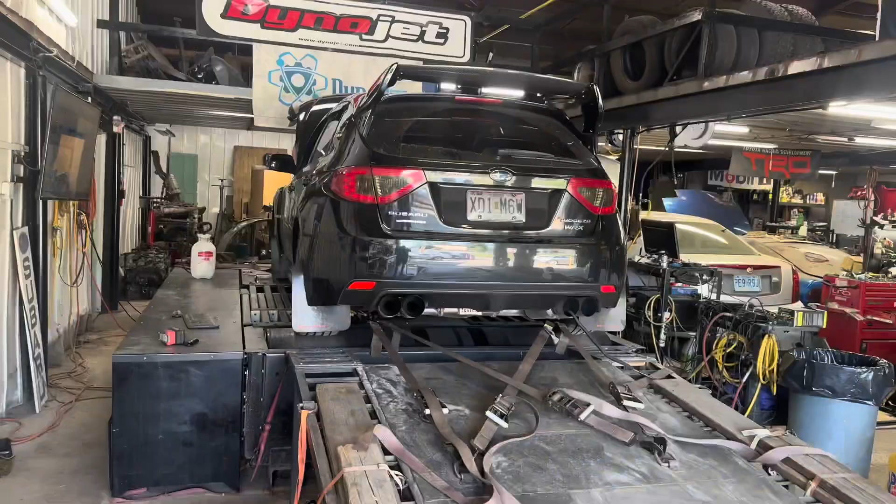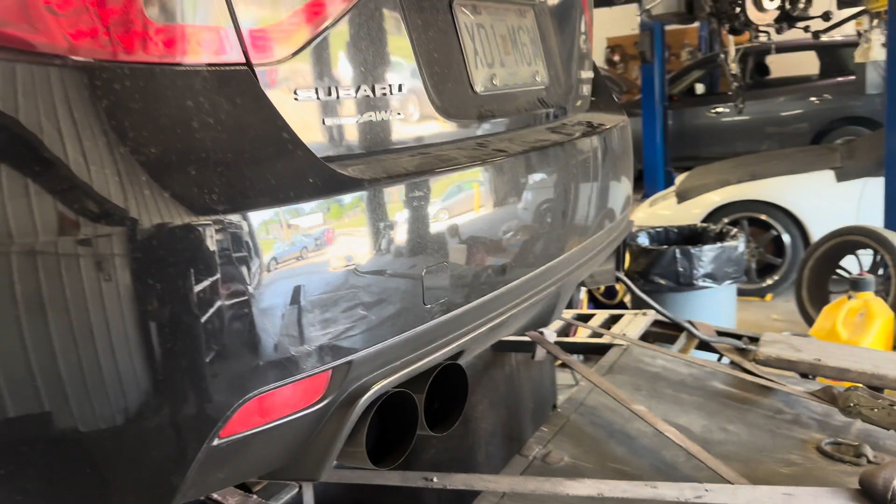As you can see, I got a beautiful Invidia exhaust back there. It's the R400 stainless steel tips. Didn't want to go burnt because you can't really even see them, so it wasn't really worth it to me for the extra $300. On top of that, I have the Legacy Spec B GT trans, diff and drive shaft - that's what I meant to say.

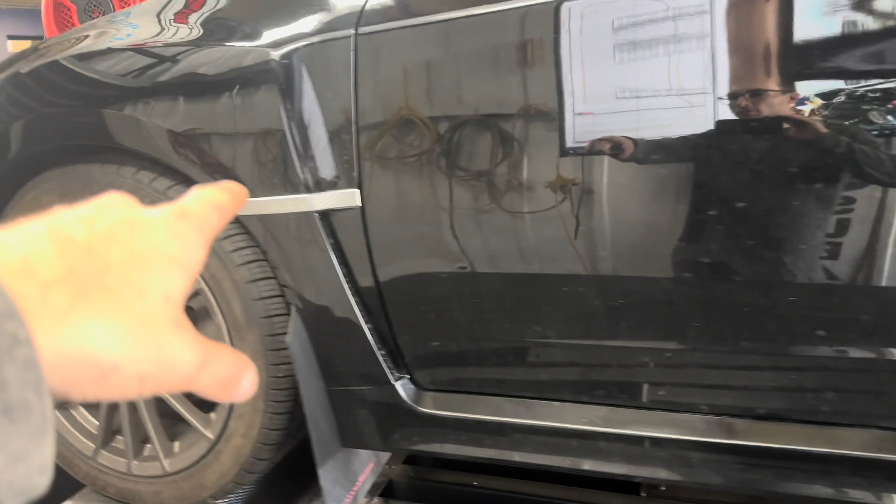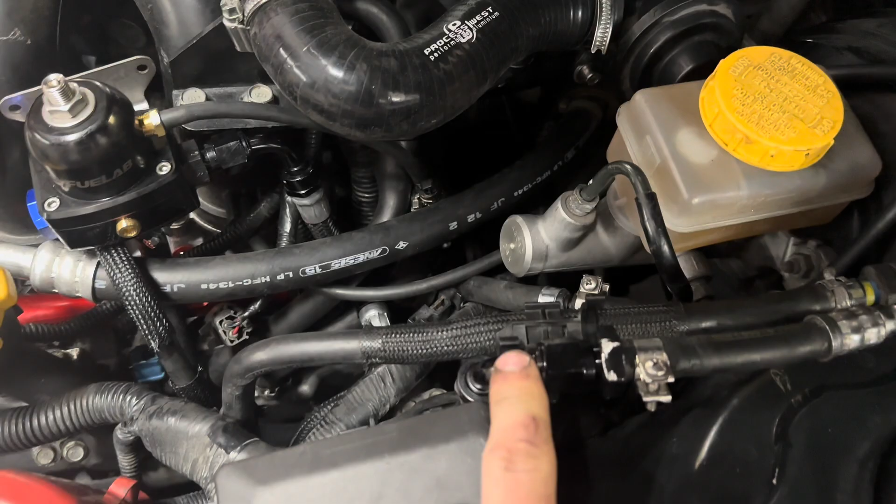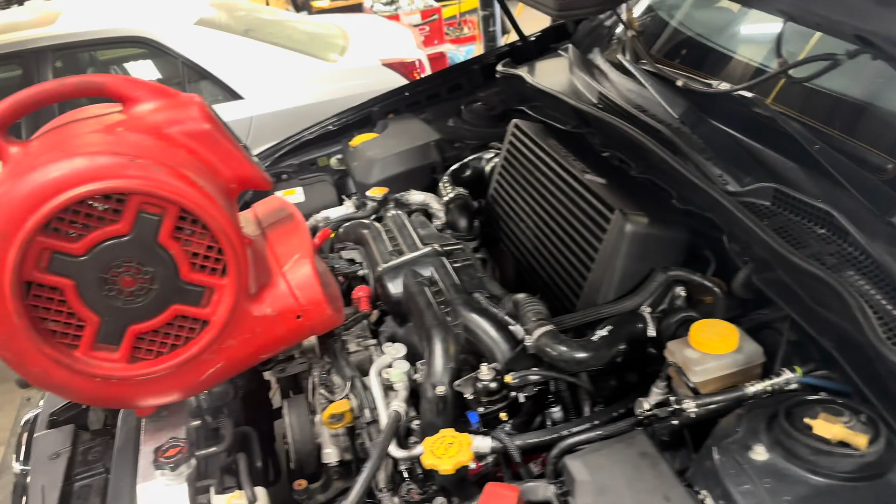Underneath the car, I have an AEM 340 pump in the rear. Stock fuel lines from underneath going to the firewall, and then from the firewall to the motor is kind of where all the business is in this car. As you guys see, went ahead and put in some AN lines, dash 6, with the regulator. Brand new IAG top feed fuel rails with the Process West intercooler, Mishimoto radiator, built motor, aftermarket exhaust side, cams, valves, springs, etc.

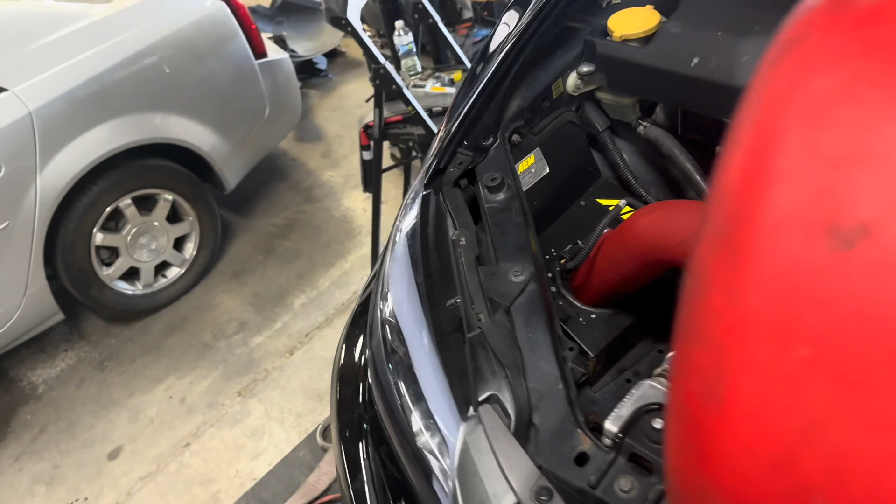I will say the biggest thing that I think is going to help us today, if everything works out properly, is this gigantic, monstrous intake. Thing's massive, man. Hopefully it helps out.

Finally, baby. Let's go. After a little bit of a delay, the blue STI came out. They had made an appointment before me, which is fine - I'm not even worried about it in the slightest because it's still nice out. But getting lined up on the dyno now for the official time. No one should be in our way and we can make some power.

All right, so the car's strapped in. He's getting set up - he's gonna go ahead and do a pull on the original map that's on it right now to get a baseline of where he's got to get the targets and everything. So once we get that, we get the fuel pressure set to 43.5 PSI base pressure. That way we know fuel pressure is good with all the lines and everything, and then hopefully we can hit our goal for today.

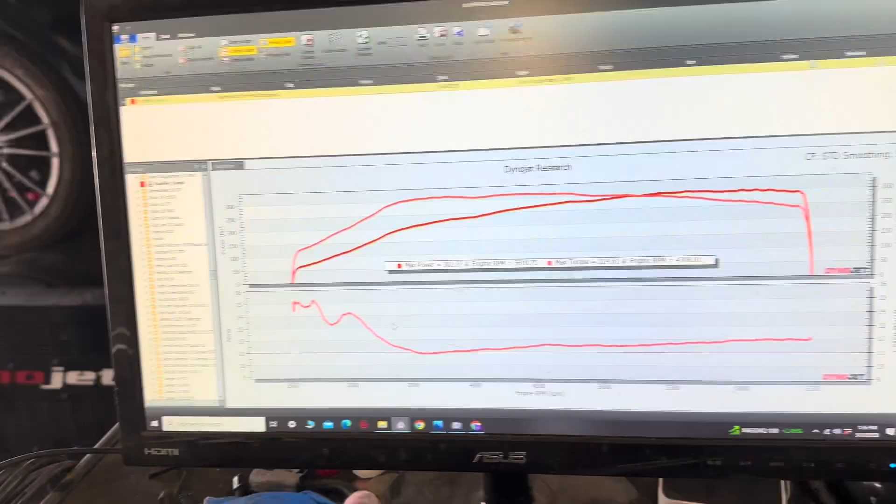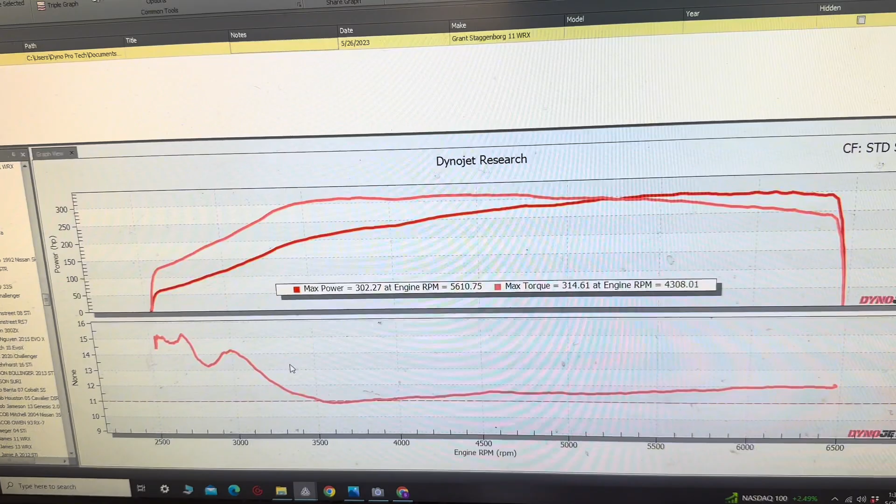So as you can see, it made 302 at 314 torque. So a little bit lower than what it made last time. But obviously he's got to tune it properly now for the new fuel rails, fuel lines, and injectors and all that.

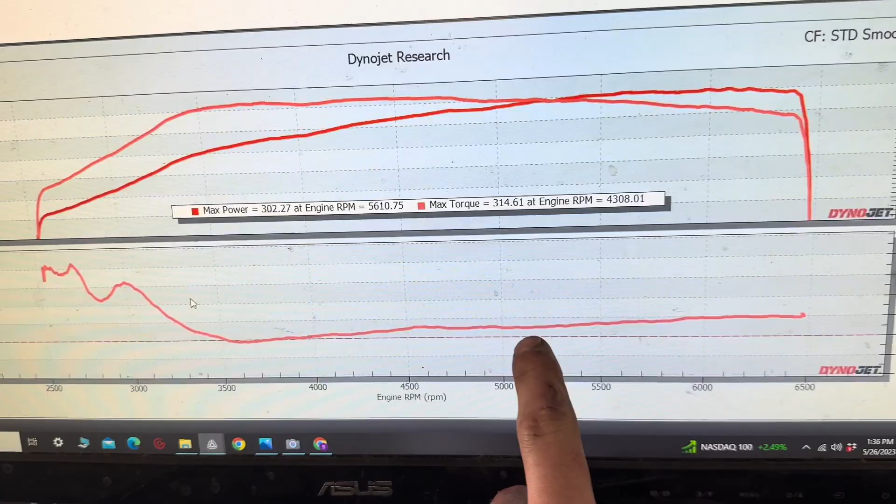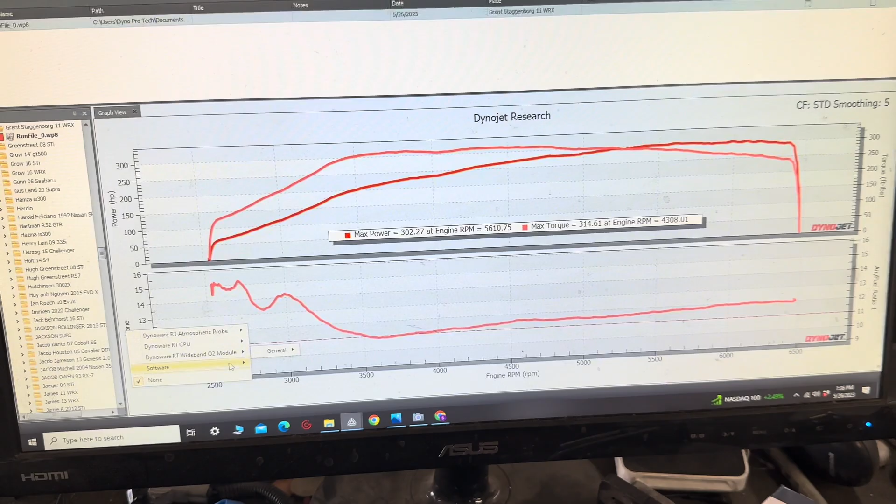But yeah, I was gonna say it does run pretty lean around 6,500. So there's a lot to clean up. But so far, that's actually not a bad start, and I think we can get there.

All right, a little bit of an update after that first pull. So apparently, I didn't know this - I was already at kind of like the max limit for this setup, if you will, because I'm still on the stock boost controller, which is a 2-port.

My buddy Jeff, shout out to him, came by on his lunch break. He actually gave me a 3-port Grimspeed boost controller a while back and I never put it on, never installed it, just because I figured, what the hell.

That run you saw, I made 302 at like 315 torque. It's not bad, it pulls well. The graph was very linear other than the slight leanness at the end and some other stuff.

But Adam's going to work his magic. I'm actually going to run home real quick, grab that 3-port so we can install that. Hopefully we should be able to turn it up a little bit more. But man, I'm kicking myself right now because I didn't think I would need to install that.

But glad that I have it because we can get that puppy on, and I think he's going to be able to adjust the fuel table or adjust the turbo and everything a lot better with that. So that's kind of the goal now. Our goal is still 325. Should still be able to get close to it today, but we'll see.

So I made a few little adjustments to the current setup and everything that's on it. He's going to do another test run just to see, he's still figuring out his settings and everything for the tune, so he's gonna run one more real quick.

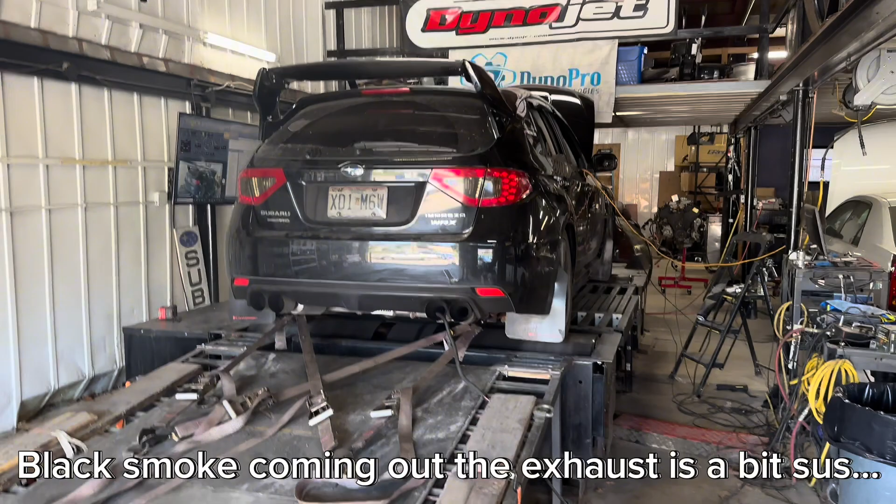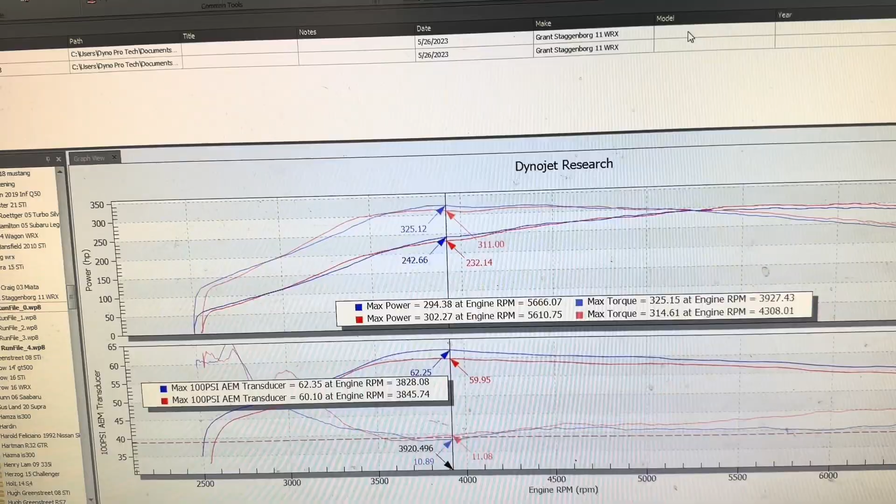All right, so a little bit of a success on that pull. Went ahead and made his adjustments, and I'll show you guys in a second. So this is the pull that he made in the red earlier. Obviously it was a little bit lower, and you can see that's where we started, I guess. It was running really lean up top.

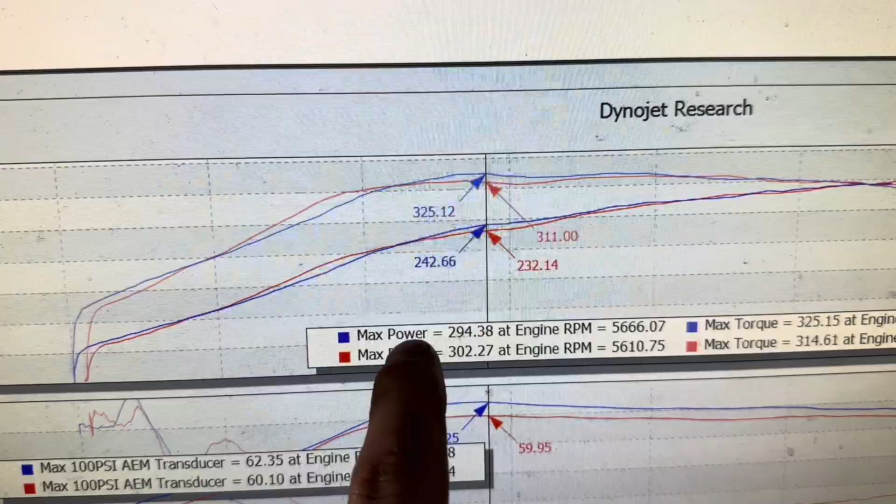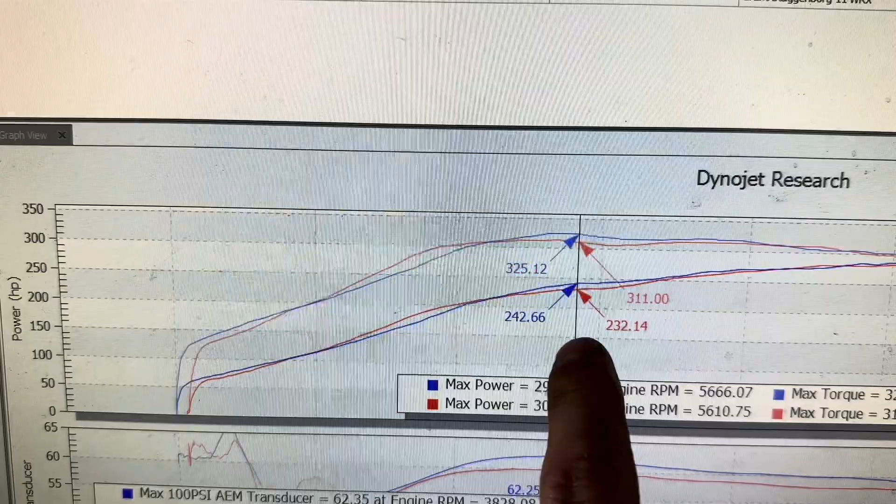So then he went and made adjustments, and the blue is the pull that he just did. We got our torque curve back, which is pretty good. All of it's very flat, but we ended up losing a little bit up top, and the power dropped just a hair.

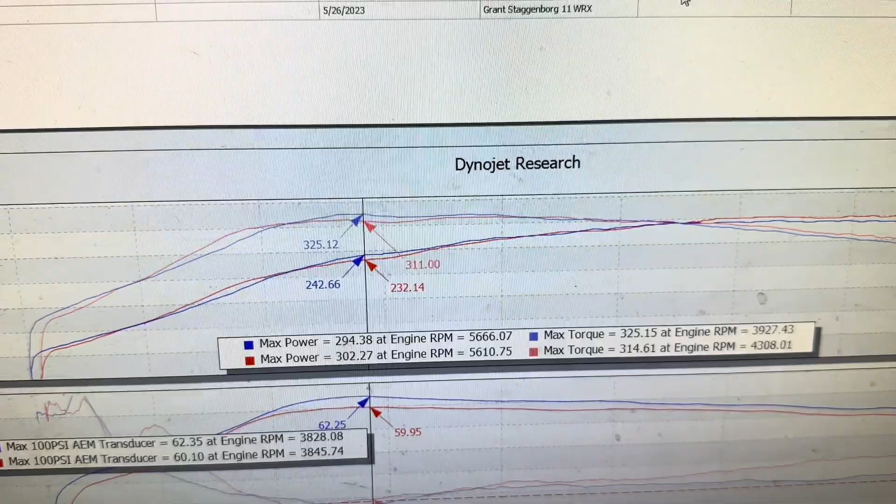So what he's gonna go ahead and do now is probably take another degree of ignition out, add a degree up top. That way it should flatten everything out and fix everything. Then hopefully we can go from there. But so far this is looking really good.

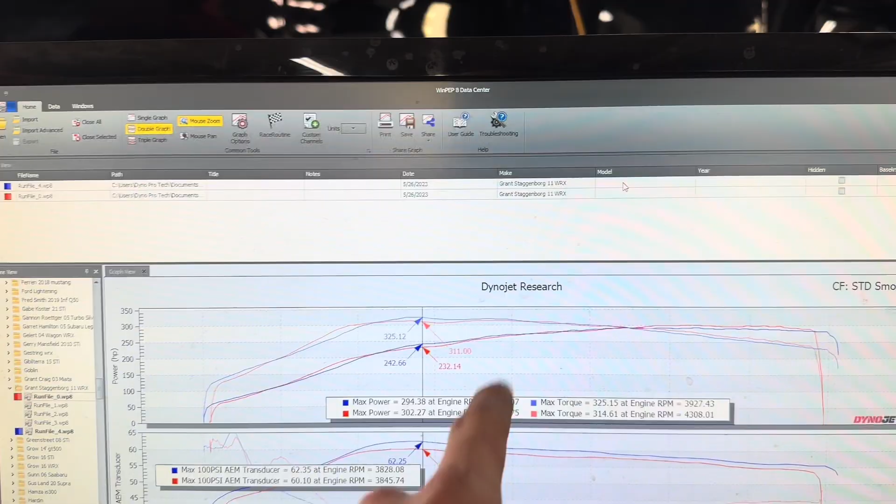The car's running hot, I know that. But so far this is actually really promising, and so far I'm pretty happy with it. It looks good. All right, so we went ahead and adjusted the ignition timing like I told you guys.

Adjust a little bit more fueling, kind of help it out. But we're gonna run this last pull. And if he likes it, we're probably going to end up stopping there just because of a few limiting factors. I don't think we're going to actually end up putting the 3-port on today, just because it's not worth it.

Last run, boys, doing a little bit more adjustments, but last run of the day. Unfortunately our tired little turbo has got 176,000 miles. I think that's gonna be our limiting factor today, but we're gonna see what he can crank out of it.

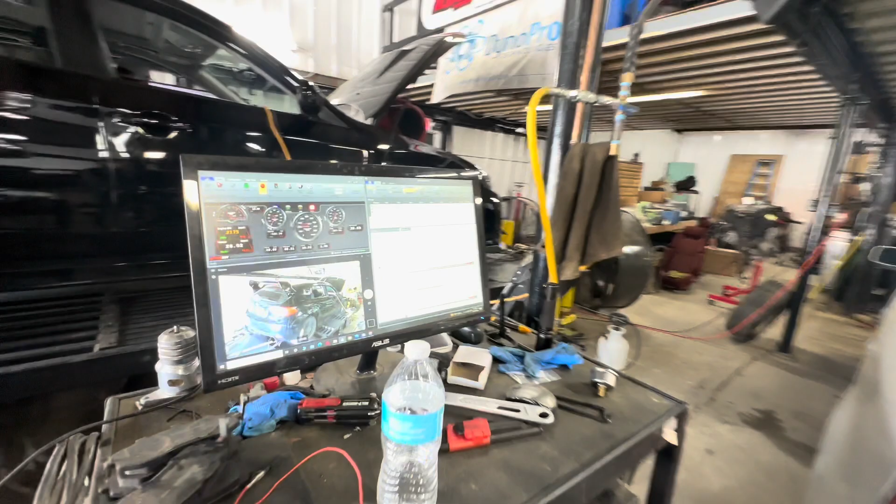The results are in. Holy shit. So what AFR was that at though? Well, that's not terrible, that's still in the safe parameter too, right? That's where we're gonna be ending up today. Pretty freaking good curve. I'm fine with that, yeah.

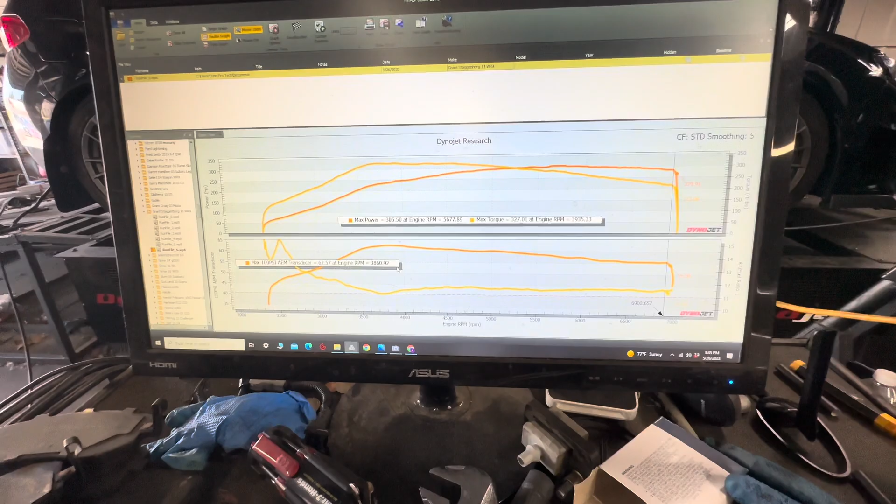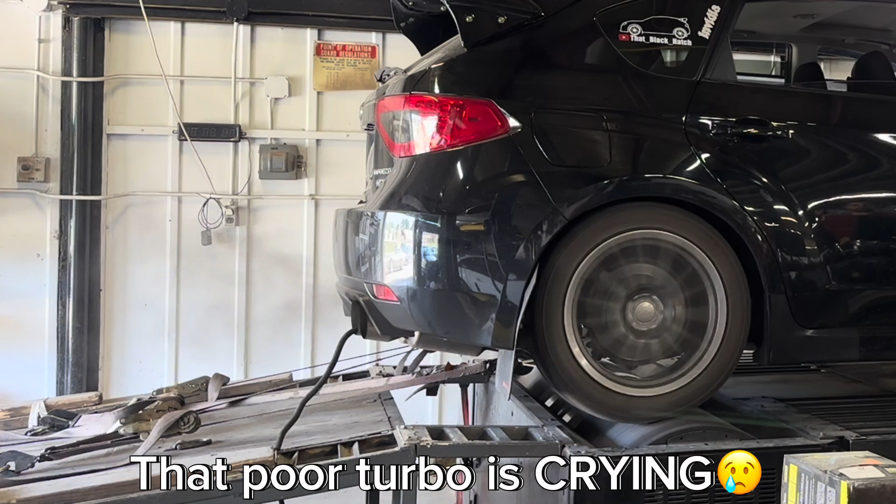Well, all in all, I will 100% say that today is a success. The car did the deed, Adam did his thing, and it's driving off the dyno. We made some more power, and more reliable power at that. And no leaks, no nothing.

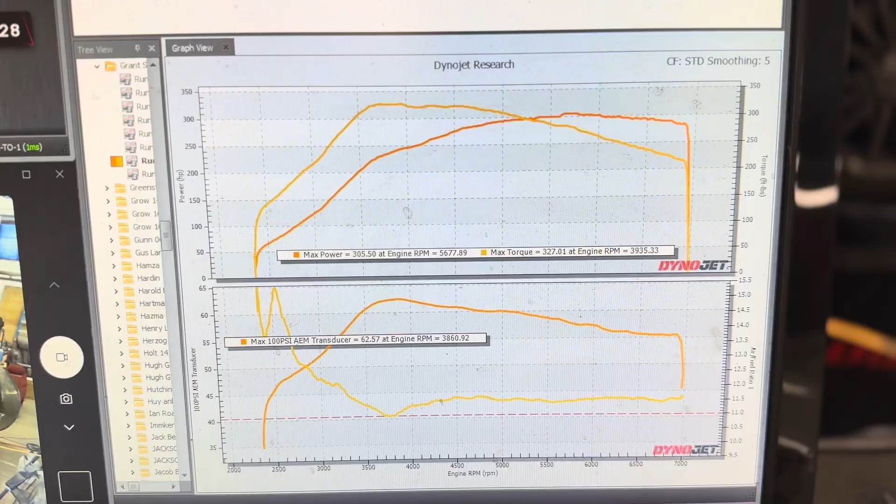That's awesome. So with all that being said, our final numbers that we made for today. Now keep in mind guys, my turbo has 177,000 miles on it. But our final numbers for the day were 305, 306 if you want to round up, at 327 torque even. The curve is beautiful, everything looks great. Fuel tables look good, super super happy with it.

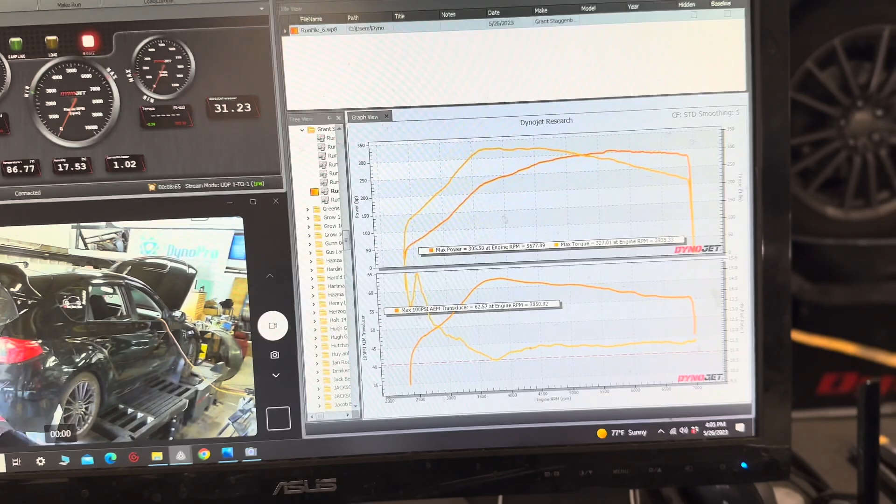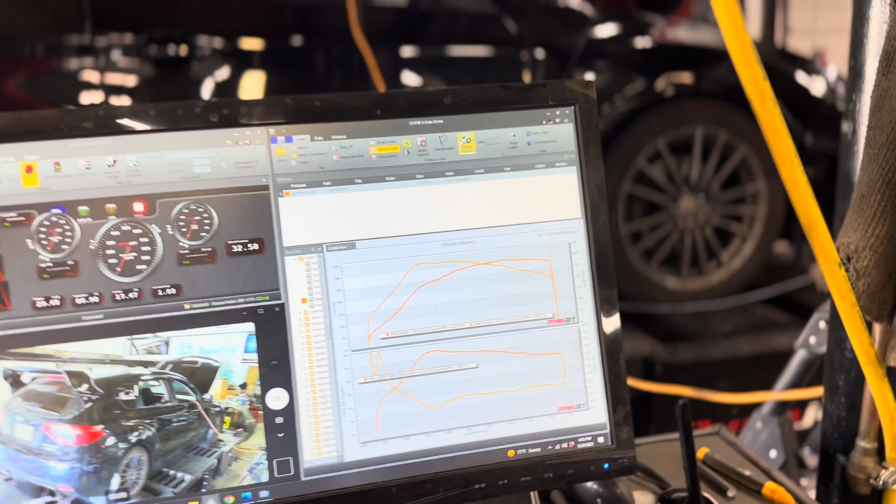And it's on the 6-speed, so there is a little bit more of a drivetrain loss there, unfortunately. But overall it's more for just better power handling I guess. But I don't know, the car looks good, it sounds good. I never really get to hear this car outside the dyno, or from an outside point of view. So getting to hear it from an outside point of view for once and watching it do the thing that I do on the inside, it's pretty cool man.

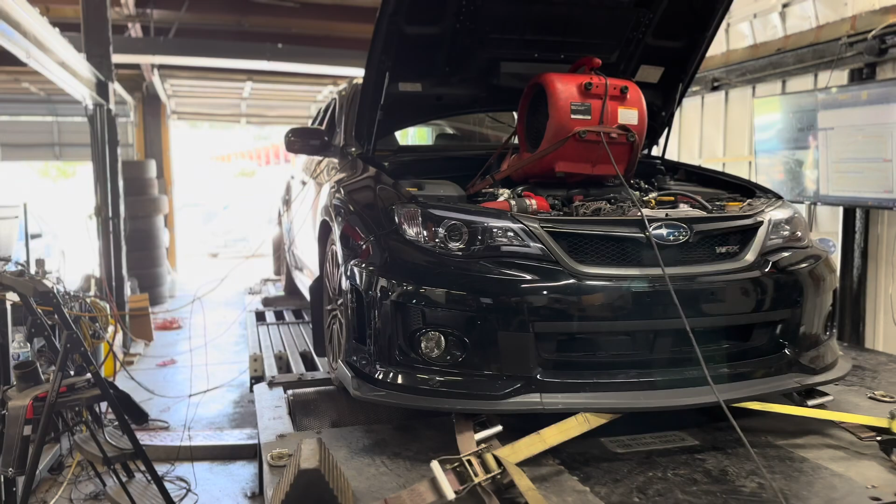But we're all said and done here. So he's gonna pull it off the dyno, and then we should be able to go get some first drives. Oh, and T showed up, came to say hey, got his car taken care of. We got to do his trans fluid, and then we're gonna race.

Well, maybe, we might. Little does he know he's about to get gapped. Yeah, fat walk, he's gonna get gapped. L, he's gonna take a fat L. Show the other clip. What clip? The clip of me beating you by a bumper. Oh, my bumper? Bro, I let off. You can hear it. Dude, I was ahead. All right, roll the clip. I'm gonna play it right here. I wasn't by a bumper, bro. I was ahead of you when you let off. I was ahead. Yeah, because you got over. I let off. I bet I can get Anthony. This dude.